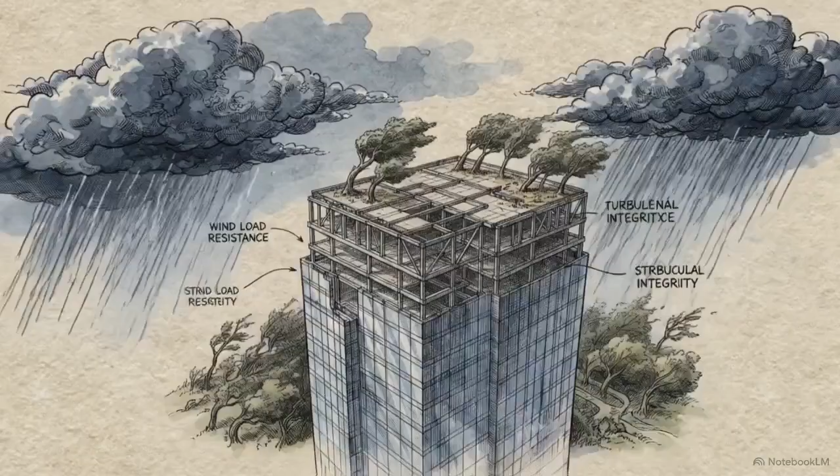When you stand inside a modern high-rise, you expect the floors to hold your weight and the glass to resist the wind. We place absolute trust in the structural integrity of the spaces we inhabit. But concrete and steel are inherently vulnerable.

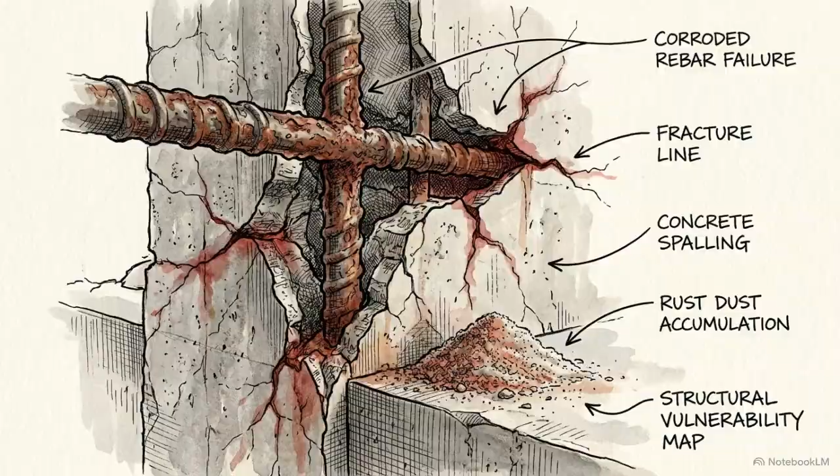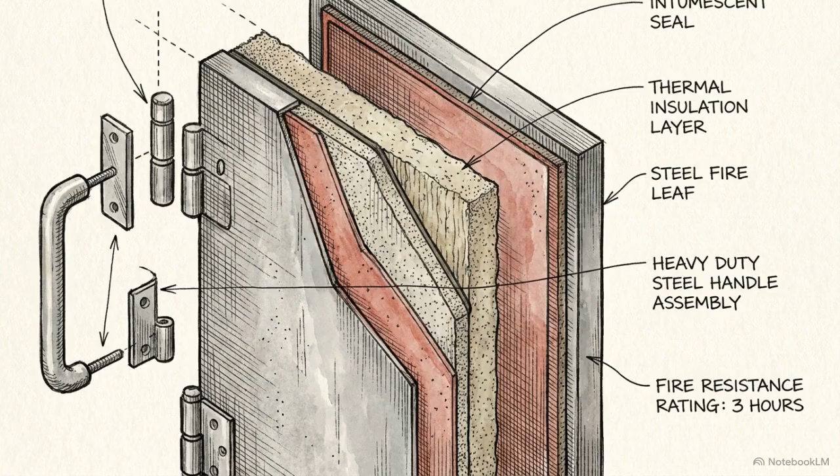Without strict, legally binding parameters governing exactly how they are tested and assembled, modern materials can easily succumb to fire and extreme stress. The mechanism keeping these structures intact is the National Construction Code, or NCC. It acts as the invisible legal architecture that holds the Australian built environment together. Every single firewall, every sprinkler system, and structural limit embedded in this code exists for a reason. These protective measures were drafted into law precisely because a historical failure demanded them.

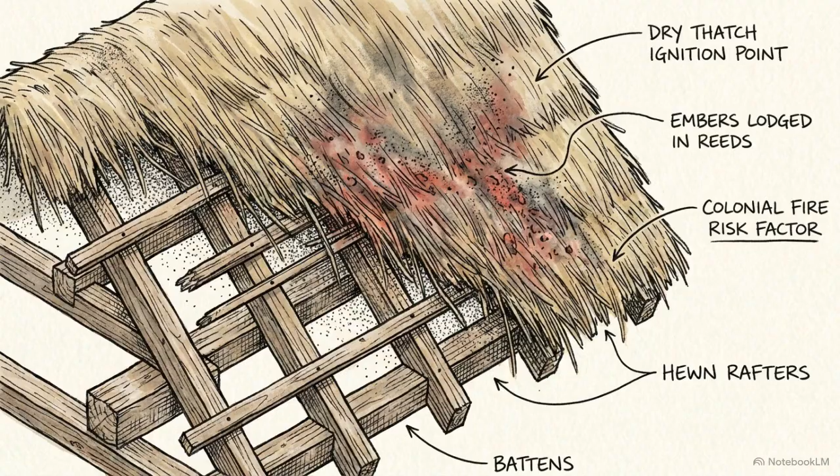Australia's earliest building regulations were drafted in the 19th century as a desperate reaction to a specific threat: dense, timber-framed colonial settlements with thatched roofs and open fires.

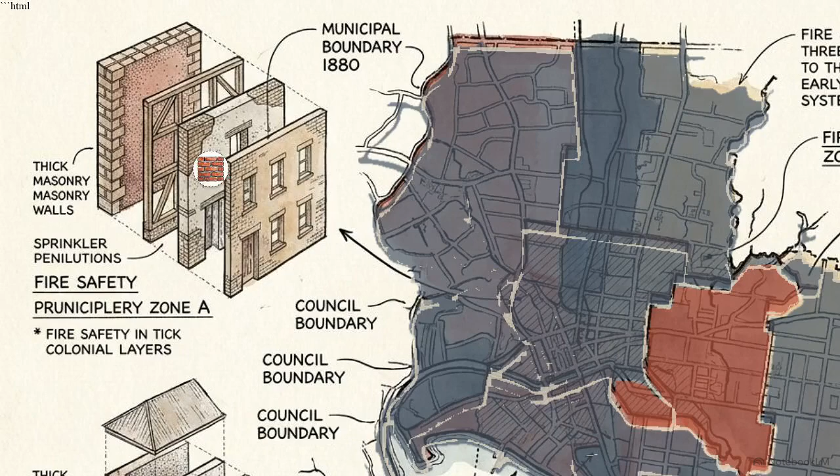As cities grew, the responsibility for safety fell to local municipal councils. This created a fractured system of localized bylaws. One council might demand thick brick walls for buildings over 2 stories, while the neighboring postcode required no such thing.

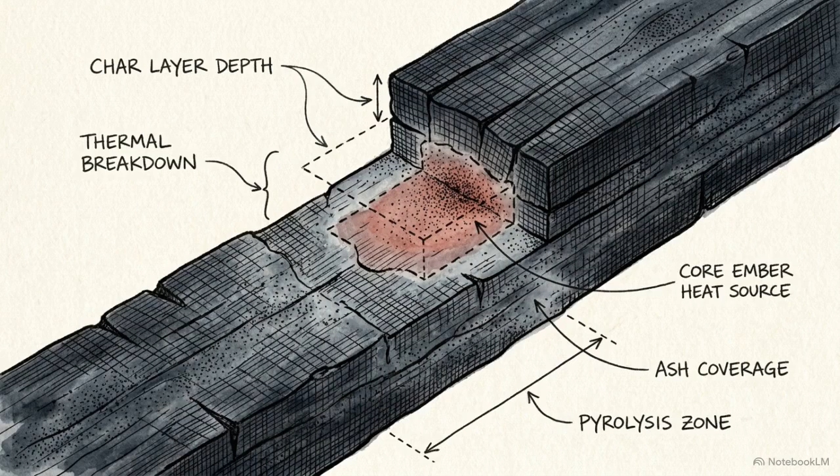By the mid-20th century, this patchwork system became an economic nightmare. A national supplier trying to introduce a new facade panel or structural connector had to navigate dozens of contradictory council rules to get materials approved. These hyper-local prescriptive rules managed the immediate fire hazards of the 1800s, but they eventually created a logistical bottleneck that stalled construction innovation for decades.

Through the 1980s, the Australian construction industry was expanding rapidly. The sector demanded a single, unified standard to clear away the regulatory chaos.

The federal government has no authority to create national building laws. That power is reserved for the states. The 1988 Building Code of Australia was published as a model document, gaining legal power only when states drafted it into legislation. Aligning 9 different governments on a single standard was a massive microeconomic reform.

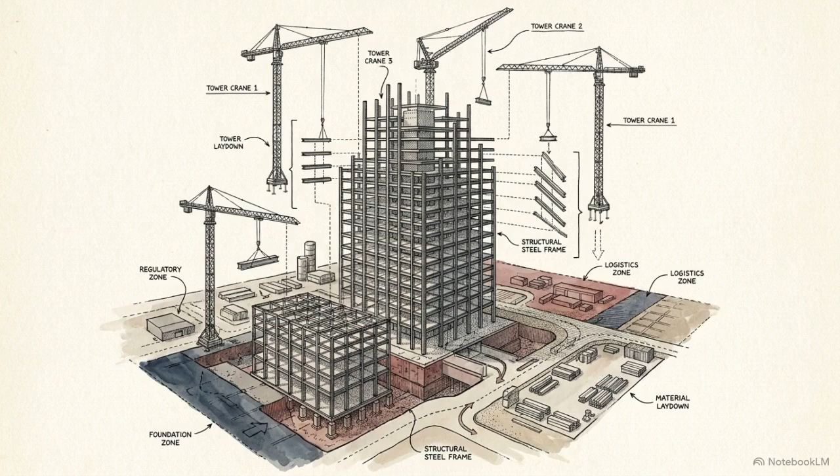It eliminated the cost of navigating multiple regulatory systems and unlocked a new level of industry productivity. In 1996, the newly formed Australian Building Codes Board executed a massive pivot. Instead of dictating exactly how a building must be built, they rewrote the code to dictate what the final building must achieve. The code features dual pathways.

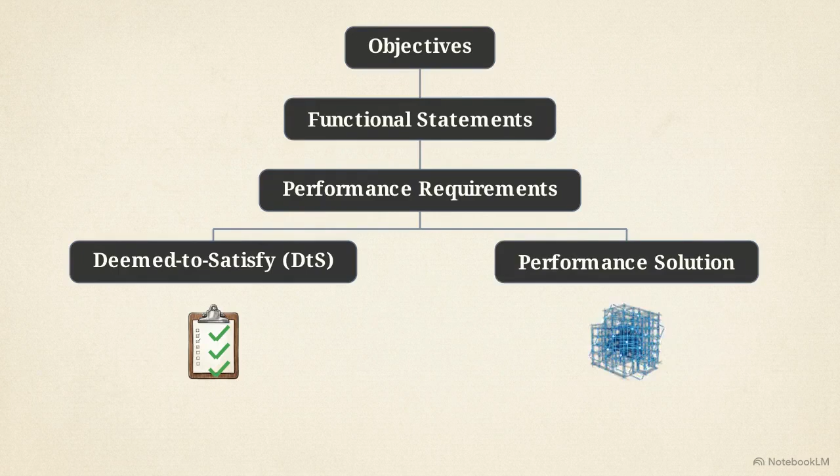The deemed to satisfy route is a traditional recipe book. Following a rigid checklist guarantees compliance. The performance solution route lets architects propose novel designs, provided they mathematically prove the structure meets core safety objectives.

This shift allowed for expansive open floor plates and complex new geometries. It also transferred a heavy burden of risk directly onto the individual certifiers, who had to verify the engineering logic.

In December 1989, a magnitude 5.6 earthquake struck Newcastle, killing 13 people and destroying modern masonry buildings in a zone previously considered low risk. The disaster forced regulators to mandate rigorous limit state design and apply widespread seismic hazard requirements across the continent.

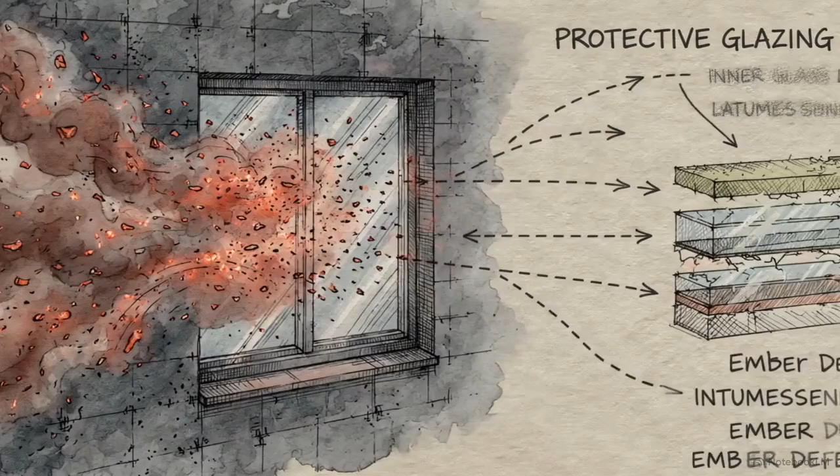Following the devastation of the Black Saturday fires in 2009, the code's bushfire attack level framework was heavily reinforced. It mandated strict use of non-combustible materials and ember-resistant openings tailored to a site's exact radiant heat risk.

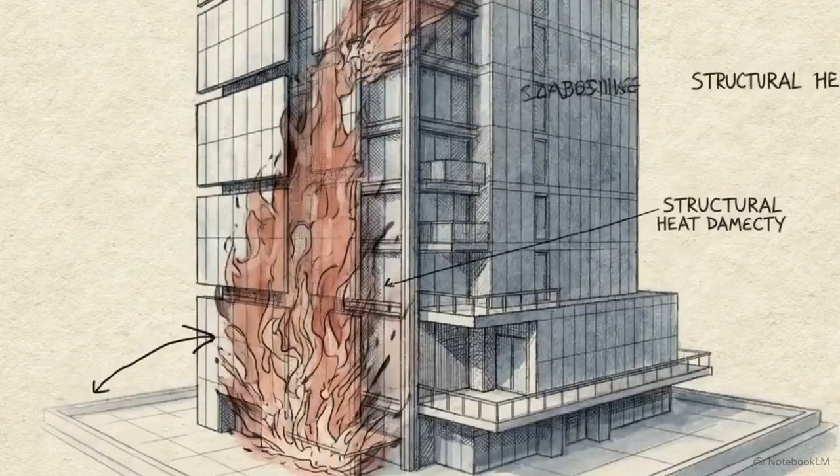When fires raced up the aluminum composite cladding of the Lacrosse Tower in Melbourne and later Grenfell in London, it exposed fatal flaws. Regulators executed sweeping crackdowns on the use of combustible external facades on high-rises.

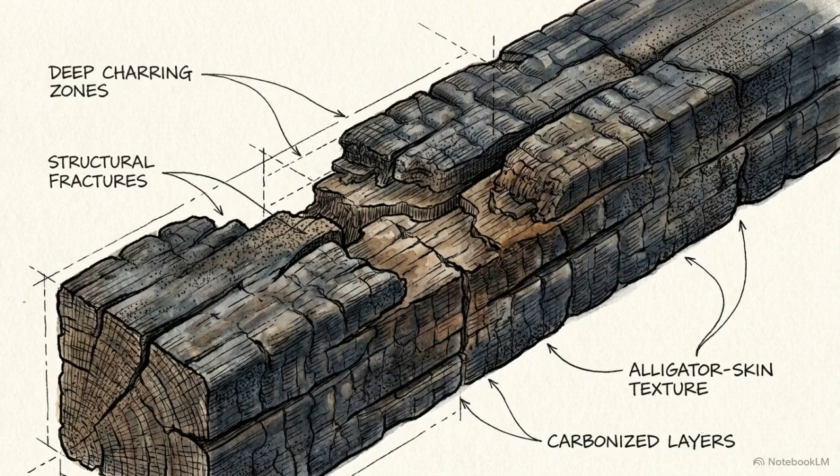The building code is inherently reactive. It purchases its safety rules with the cost of these previous systemic failures.

By 2011, the rulebook was rebranded as the National Construction Code. Regulators integrated a massive new 3rd volume, absorbing plumbing and drainage to enforce water efficiency standards nationwide.

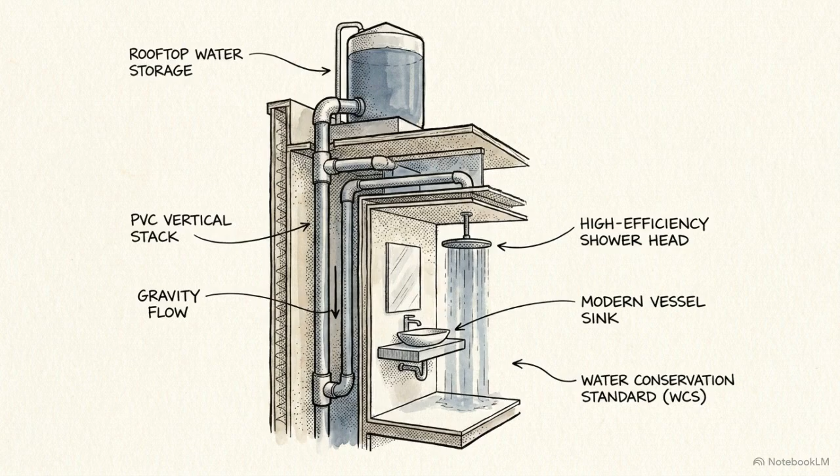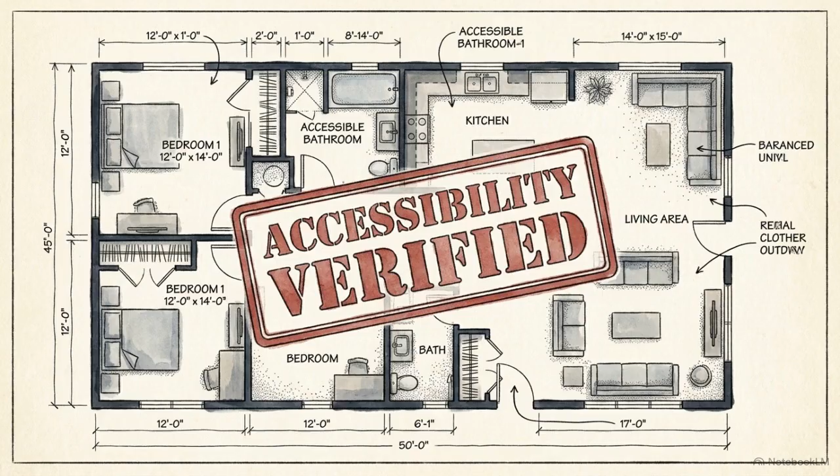That same year, the code introduced mandatory livable housing design standards. Features like step-free entries and wider doorways are now required to ensure new housing stock can accommodate an aging and disabled population.

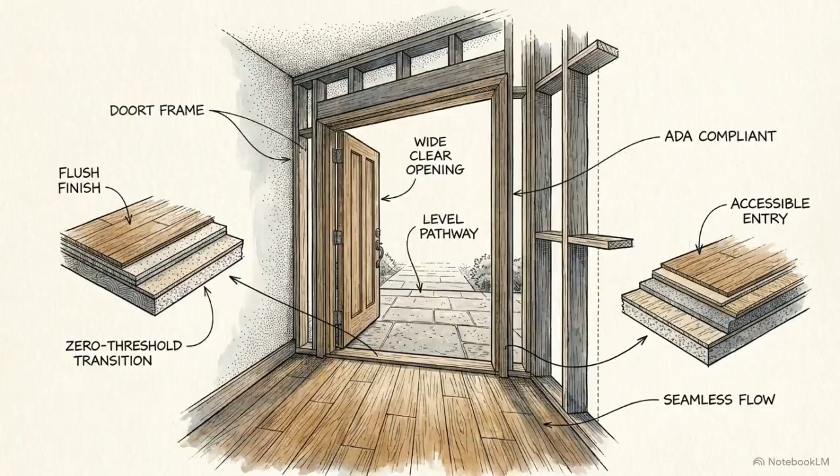Modern building regulation now engineers for the long term, weaving environmental performance and societal accessibility into the definition of a safe structure. The next regulatory frontier is embodied carbon.

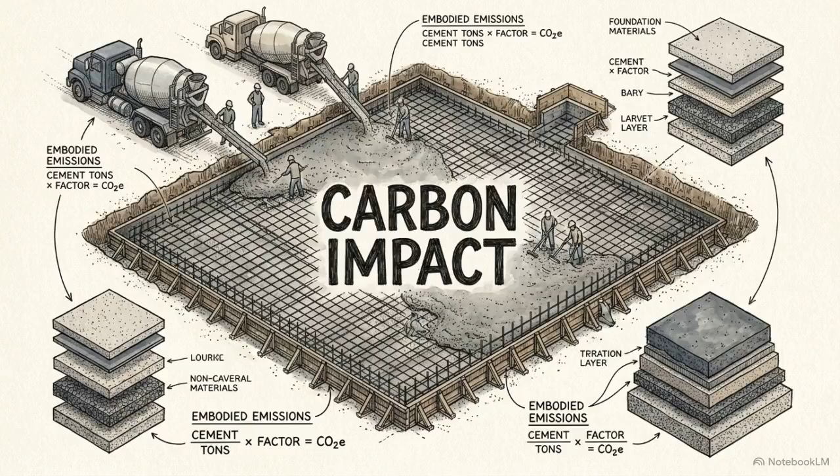Future editions of the code aim to track and limit the greenhouse gas emissions generated by manufacturing and transporting building materials, driving the industry toward net zero emissions.

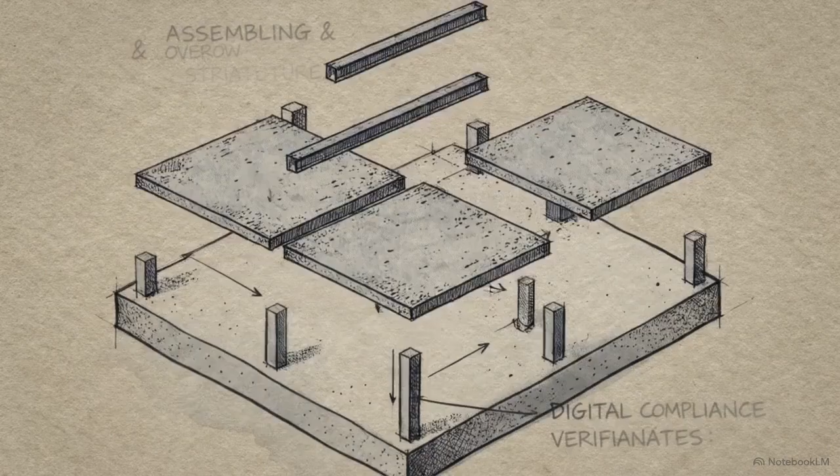We are also approaching the era of digital twins. Soon, building information modeling software will algorithmically cross-reference a digital replica of a structure against the NCC, verifying safety compliance before a single foundation is poured.

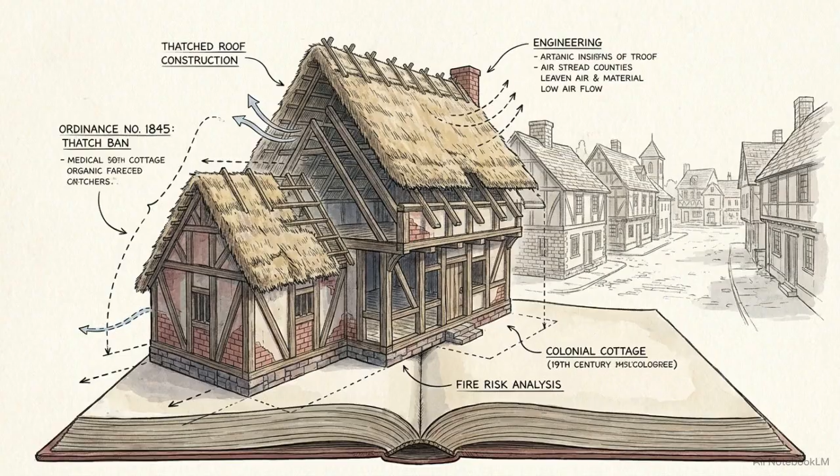The rules have expanded from scattered colonial ordinances banning thatched roofs into a highly sophisticated, unified legal framework governing every pipe, wire, and beam across 9 jurisdictions. The National Construction Code stands as a 160-year archive of human effort, a physical record of our failures, and the engineering triumphs used to overcome them.